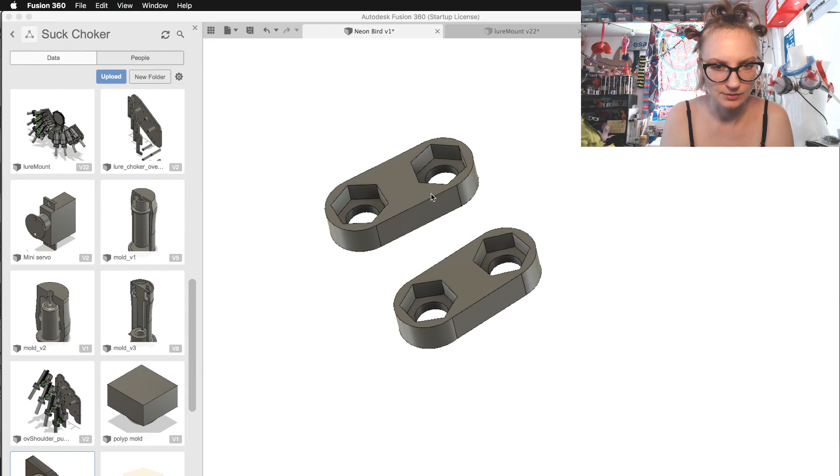Okay. Sure. I knew I was going to use these tiny flamingos one day, so I bought as many as I could last year. And I went to Target just this past Sunday, and I wanted to check and see if they had more, which consequently they did in their dollar section. And I bought out their crappy miniature pink flamingos, and they're on sale for 50 cents, so it was really silly that I not do so.

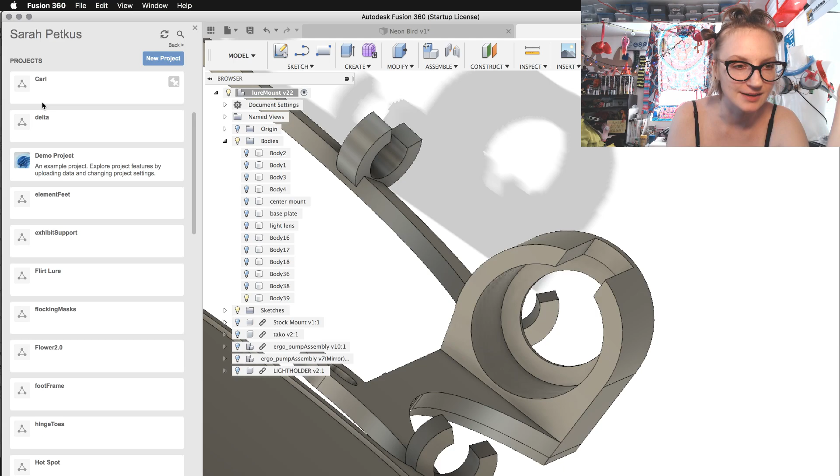Where's Carl? There we go.

Alright, so that's the important part of what I've made so far. Let's see.

Ah, there we go. That's better. Okay, so that's more or less what we've got at the moment.

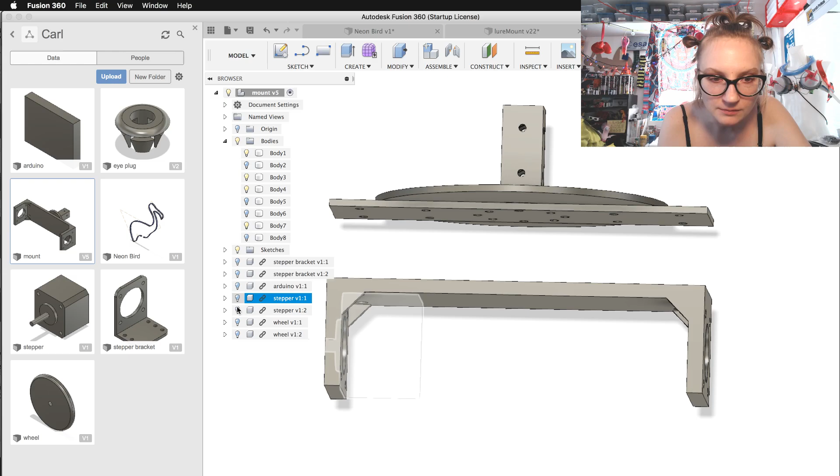So if you imagine spacers on the corners here, and everything just sort of stuffed in this space, that's effectively what I've got going on at the moment. There's my 2 steppers, there's my 2 wheels, and then I've got an Arduino stand-in right here, which isn't doing anything. Yay.

So the thing I need to do is find a way to mount the motor drivers, and they don't have a mounting hole or anything, so I soldered wires to them, hard solid wire into the holes of the pinouts I needed, and the other end is just jammed into a breadboard. So the module is being flailed around at the whim of the solid wire sticking out of the breadboard. I do need to come up with a way to probably get those in.

And the same thing with the accelerometer. If anybody has experience making one of these and you have tips you want to share, I would happily listen to you and your tips. I would accept the advice gratefully.

I'm checking the chat. No, I'm not drawing with a mouse. I'm drawing with this. It's a Wacom Intuos 4. It is over 10 years old now.

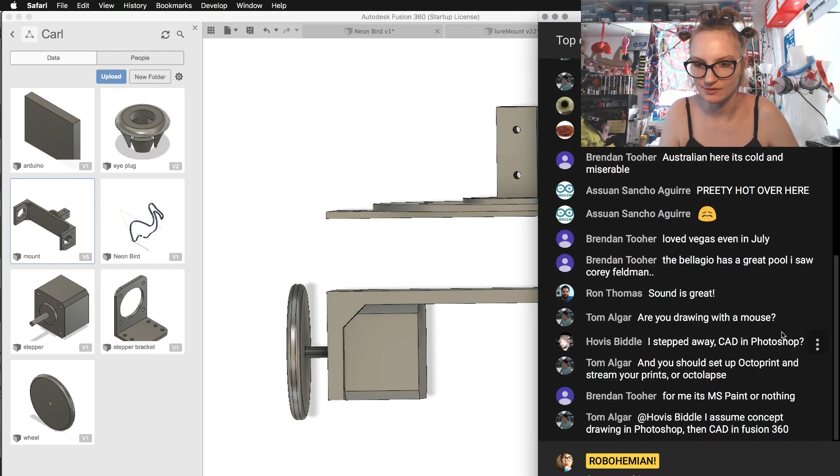Yes, you were right, Tom. Concept sketch in Photoshop, and then CAD in Fusion, as always.

The letter G. I am the letter G. Okay. Where was I?

So I think this piece that I'm about to design, I'm not entirely sure what its critical shape or placement needs to be, because I'm not sure at what point it needs to catch the robot once it starts tipping in that direction. So I'm gonna probably make a shape that can be modified fairly easily, and it's gonna probably be comprised of 2 thin pieces.

So I'm probably going to end up making 2 thin, like 3 or 4 millimeter thick flats. Like such. And then connecting them with spacers.

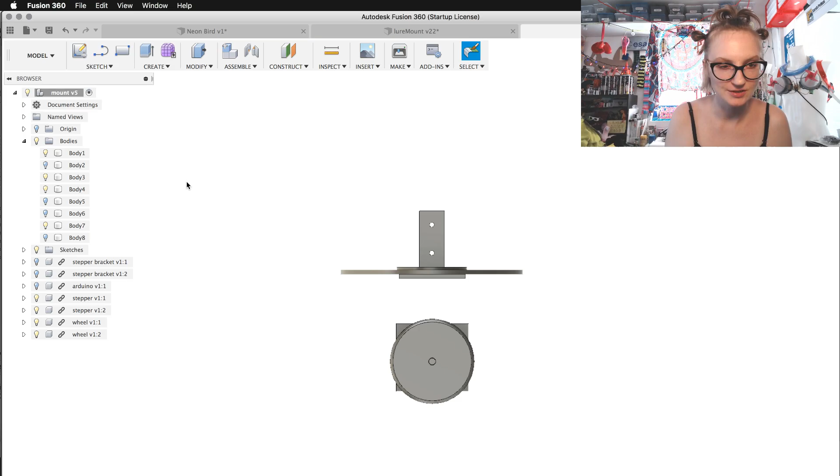No, didn't want to open Eagle. Stop, stop, stop! Hate when you accidentally click an icon and it opens an entire application and you're like, okay, so...

I hate when it corrects too. Why do you do that?

So I'm gonna just guess for now, which is kind of how this whole project has been going. I'm sure there's some magical way. Why am I using this to do CAD? Stop. I'm sure there's some magical way to math out exactly where the bumper needs to be angle-wise in order to catch the bird from falling at an important, crucial point, but I do not know it.

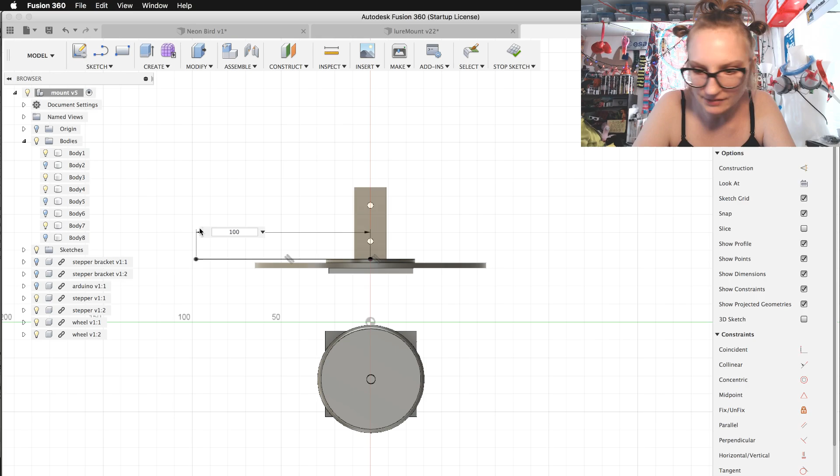The way that all of this development has gone since we started a week ago is I'll do something with no knowledge, then we'll get some code working, then we'll look at how it fails, and then I'll fix it. That's how I work. That's the way I engineer.

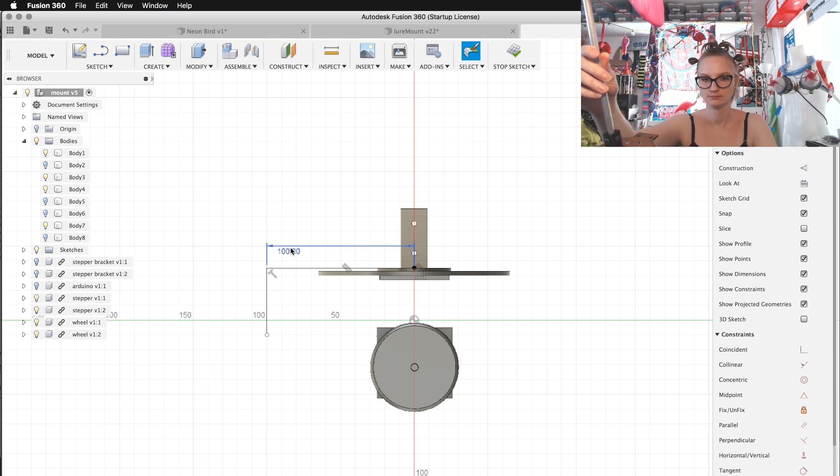And I'm gonna say 45 sounds like a good number. We'll offset this by maybe not 100. That should be good.

Yeah. Okay. Carl, you can hang out right... God, where should I put Carl? Ah, here. You can hang out right here and stare at Noodle.

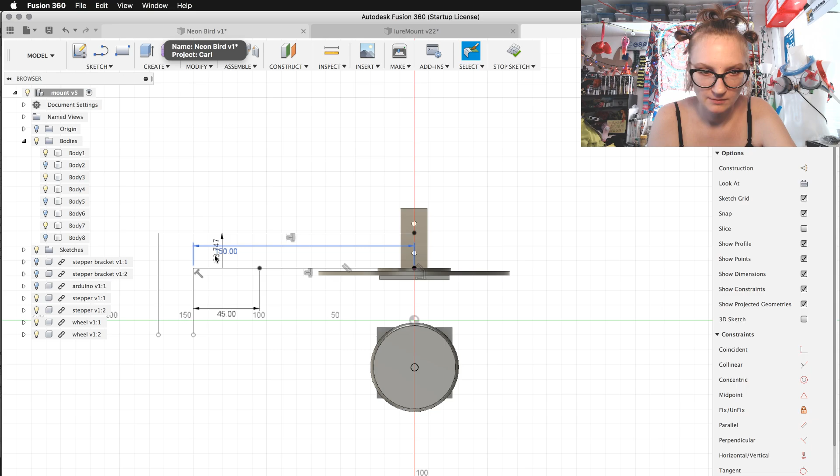Okay, so this was 45, so this will be 45, and then offset this by like 30. That wasn't 30. Oh, you jerk. 30. Thank you. Okay.

Extrude this. But I say, oh, I don't know, 4? Sure. Oh, did that attach? No, I don't want it to attach. Extrude. 4.

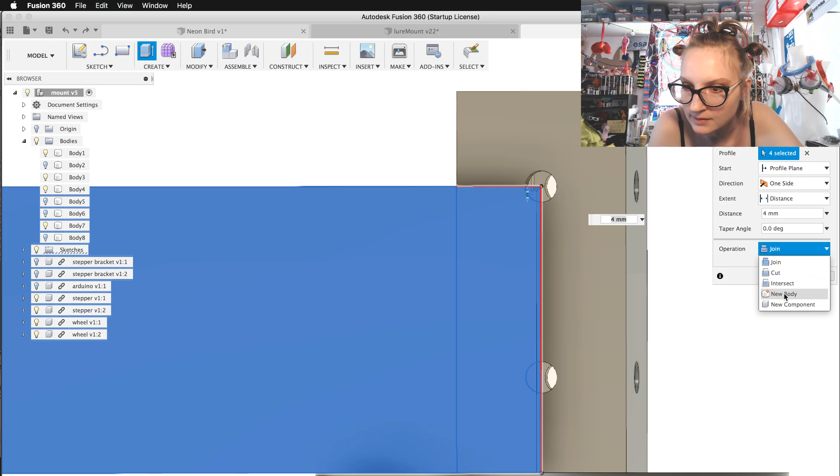Along with these little pieces. I hate when I miss the little pieces. And this is going to be a new body. Okay.

So in order to get that curve like I was talking about, I'm going to call it fillet. I know people keep telling me it's fillet, but I'm going to be irreverent and just call it fillet. I'm gonna fillet these corners and make them nice and roundy. Roundy like. There we go.

It's like a, I don't know what that is. It's like a sad floop. Mr. Sad Floop.

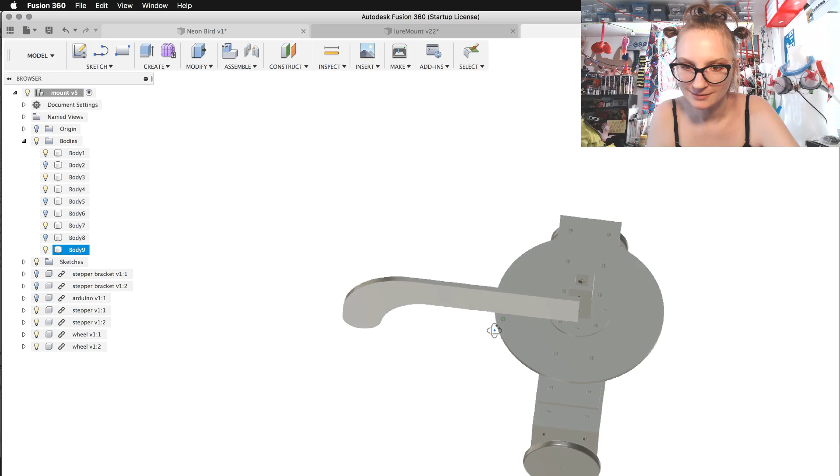Is that going to interfere with these holes? Why, yes it is. That's okay. We'll put that someplace else.

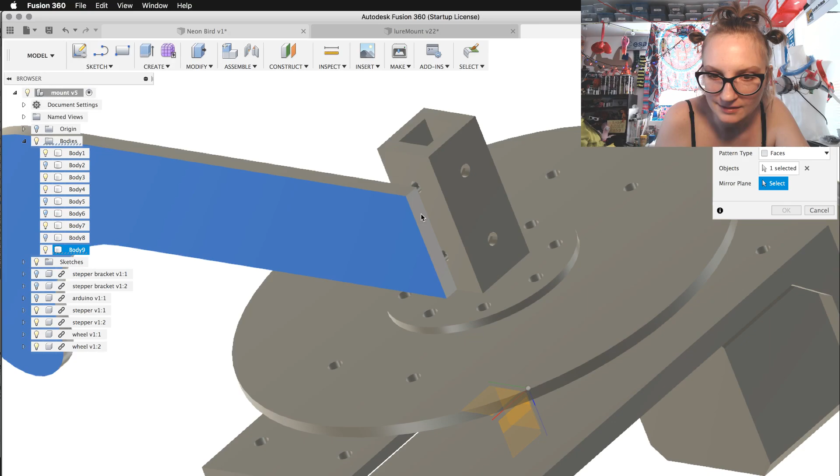Okay, so I'm gonna mirror this so that it's symmetrical and then duplicate it. So if I, oh man, mirror, there it is. I'm going to mirror you on your face, right there. No? It didn't like that? Why? Why wouldn't you like that? Did I do something to upset you? Let's talk about it, shall we? There we go. For some reason it liked that more. Right, modify, combine. Okay.

There. There's Carl's little kickstand. Ooh, that's what I'm gonna call this. Carl's kickstand. You're gonna get a kickstand, Carl. Yeah? He's gonna, like, be able to bobble back and forth and catch himself.

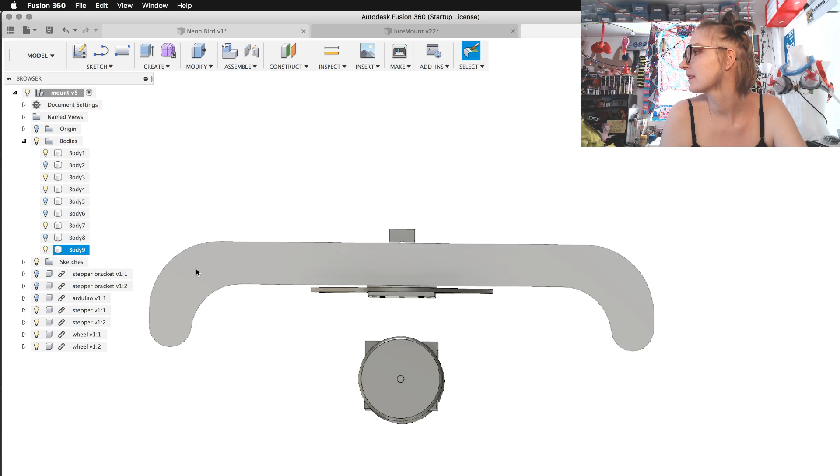I think that the primary reason why I decided to do this, it wasn't actually to save Carl's pretty face. Sorry, Carl. It's for the neon one that I mentioned earlier. I've been experimenting with faux neon a lot lately, and I'm actually gonna do a write-up on how to do the stuff I've been doing to create things that look like vintage neon signs.

I'm from a city that has a lot of neon, or at least it used to, and I was always a very big fan of the way that looked aesthetically, and it's sadly becoming harder and harder to find in my city. A lot of the neon is being replaced with LCD screens and just LED things in general, because they're bigger, brighter, probably easier to maintain. I don't know. It's the future, right?

So the neon stuff is slowly getting phased out of even Las Vegas, which was once known as the neon city. But I like neon, so I personally can't make neon. It was actually offered at my college, but I never got around to taking the class. But we do have cool things these days like light pipe and EL wire, and you can do certain things to them, create fixtures for them that make them look very reminiscent of neon.

And one of the things I wished to do was make a neon flamingo that would balance. The lattice that holds the light pipe I'm using in place is, however, very fragile, so I wanted to prevent it from ever having to collide with the ground. And the bumper is absolutely necessary in the case of this particular neon bird that I'm making.

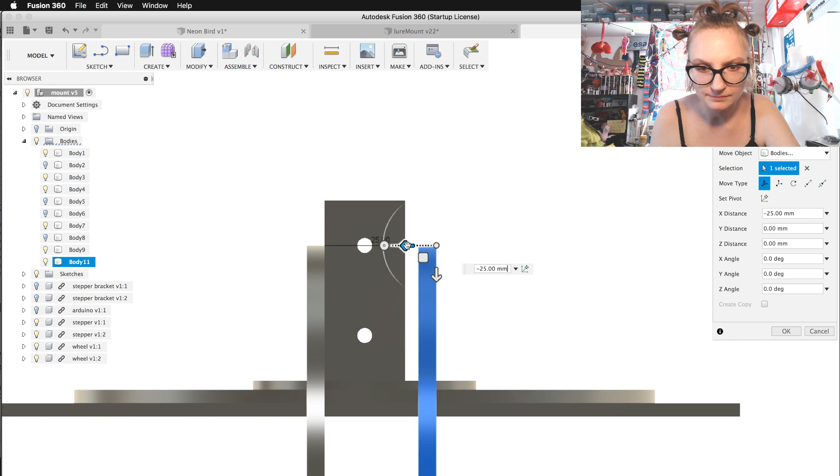And Noodle hates it. He wants to know why he doesn't get a neon body. Noodle wants to be neon. Do, do, do, do, do.

I'm gonna check the chat real quick, because it's been a minute. Oh man, there's a bunch of talking. I'm gonna read it. Do, do, do. I have no direct experience.

Hovis says, what I have read is that you want a cascade of PID controllers. The ultimate output is the angle of the robot. Ah, PID loops. Mark knows we have to use PID loops, and he's not excited about it. The angle is controlled by wheel speed, which is controlled by wheel accel, which is controlled by motor current. Oh god, I'm gonna screenshot this and show it to Mark when he gets home, in case he doesn't already know that, which he might not, because we don't know anything about this.

Okay, thank you. Thank you for sharing that with me. I don't think either of us really know what we're doing.

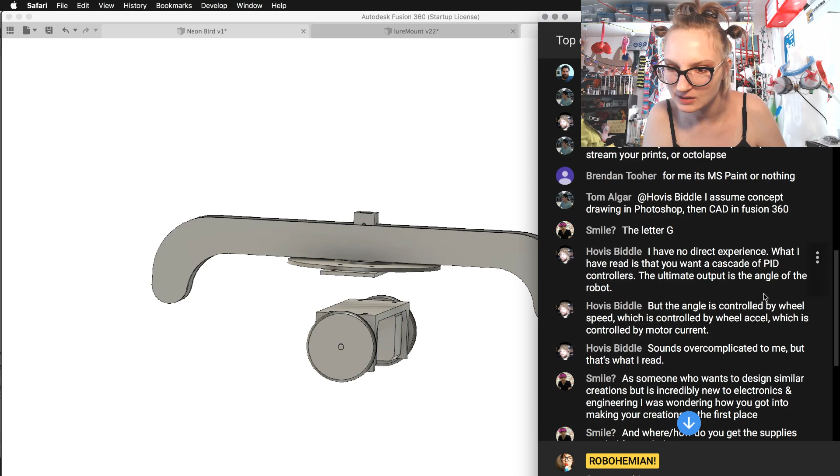As someone who wants to design similar creations but is incredibly new to electronics and engineering, I was wondering how to get into making your creations in the first place.

I guess the easiest answer is that I'm an illustrator, and I went from illustrating this stuff in my head to building it. Back in college, I was prompted to go into the art tech department, which was all electronics and robotics, and their main mantra was just create the stuff that's in your head. Ever since I was given permission to do that, that's what I've been doing. The things I would normally draw or write about, I now take a stab at making in the real world, which is a lot harder and more gratifying, because it's hard. Every single thing I make, I have no idea how to do it when I start, just like this, but figuring it out makes it even more rewarding in the end.

How do I get the supplies needed for such things? There are a couple places. Raw materials you can get from McMaster-Carr, which I don't even know how to spell, but if you try typing it, the internet will know what you're looking for. They do raw materials and shapes you can make stuff out of. I go to Mouser for electronic components, get my boards made with OSH Park or Seeed Studio, and use EagleCAD for board design and Fusion 360 for assembly creation. That's the main stuff I use, and everything starts as a drawing.

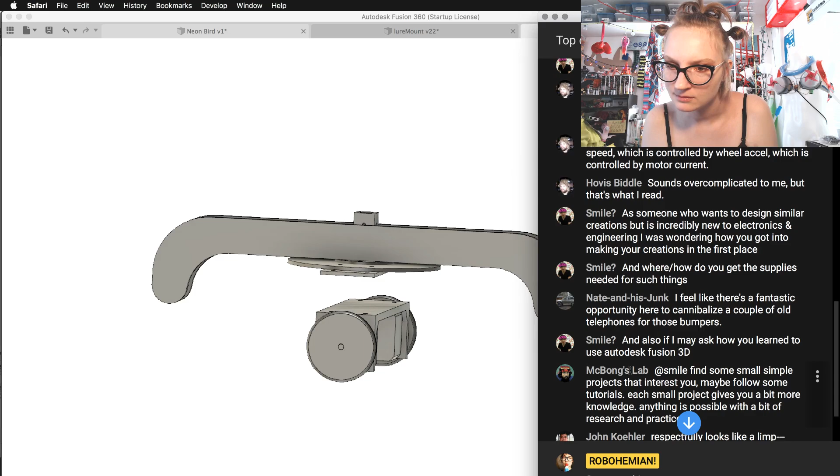How did I learn Fusion? There are a lot of good resources and tutorials online to teach you things you're unsure of, but to get started, I took something I had designed in SketchUp - the most difficult shape I ever created there - and had somebody who knew Fusion walk me through recreating that shape using the parametric CAD style. Once I saw how it was done, related to something I was already familiar with, it clicked in my head and I was able to figure it out on my own from there. It did take a person familiar with it to get my toes wet, but after that, a lot is available on the internet.

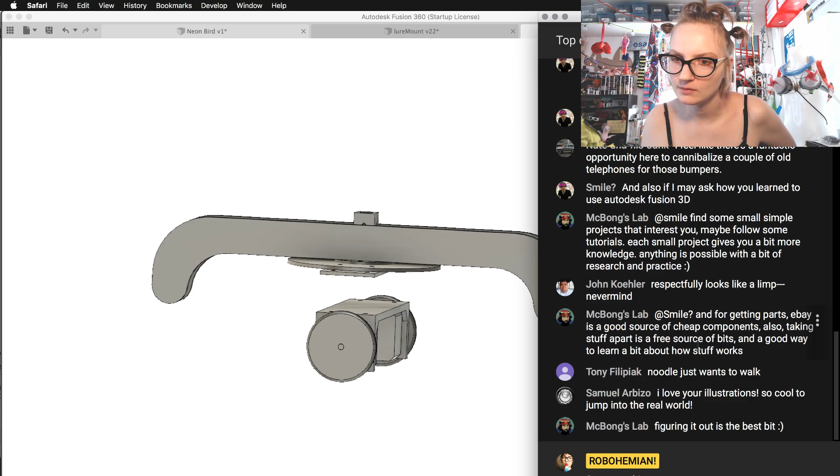John says it looks like a limp dick. I was thinking the same thing but wasn't going to say it - but here I am saying it. It looks like a sad phallus.

Oh, Tony, I know Noodle just wants to walk. Hi Tony, by the way, good morning - is it still morning? No, okay, good afternoon.

Noodle, I have to show you this now so I don't look like a terrible parent. Oh god, where'd it go? Oh no, did I lose Noodle's leg? Maybe I am a terrible parent. No, okay, Noodle's got it. Noodle's getting new legs - this is one of them.

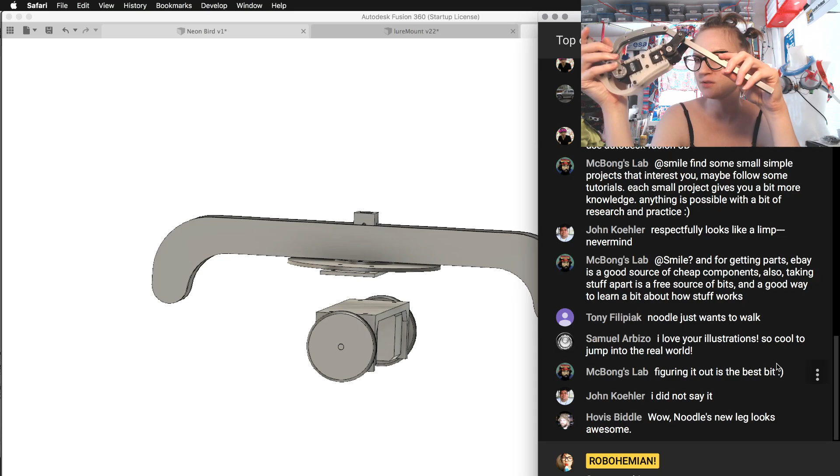This needs to be bench tested with the motors mounted inside it, same as Carl's new chassis needs to be tested once I'm done building it. So the two of them are going to get their mobility in tandem with one another. While I'm waiting on Mark to test out code for Carl's new body, I can work on finalizing the dimensions of this leg for Noodle. Eventually these will all get recreated in aluminum, but probably not until they're all made in plastic first. I'll have to buy a bunch of these servo motors, which are incredibly expensive, so I'll probably buy them 2 or 3 at a time while I have money, or maybe do a small GoFundMe for motors, because I don't have a lot of money, and Noodle's going to get expensive from here on out.

Noodle will walk, damn it. Tony knows that.

Figuring out is the best way. I'm glad you guys like the new leg. It looks cool. Here.

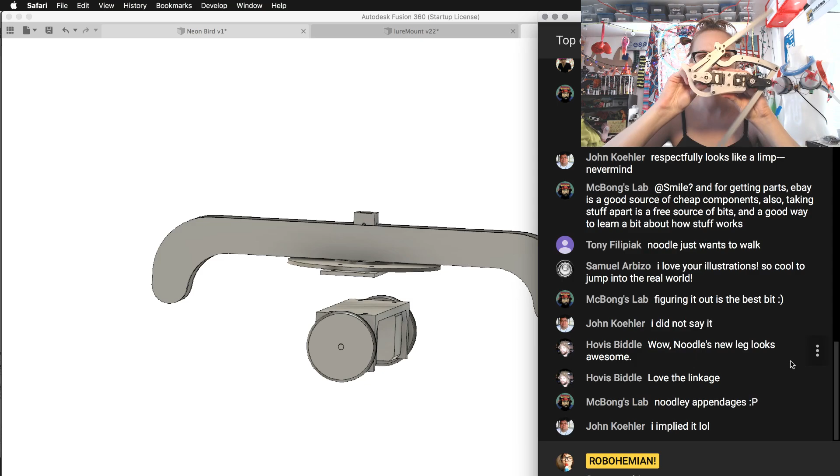I can just actuate it with my hands, so it bends. The tendon motor is down here now, and then there's a motor in the knee so the leg can actually swing out a little bit like this, which is the main difference between the old leg design and the new one.

Because this tendon motor that makes the leg lift is actually located up here with the tendon going down to the crossbar, and I moved that down so his weight is lower. One of the big problems he's always had is that he's incredibly top heavy and wants to fall and be a big heavy pendulum and just topple over.

This will alleviate that, as well as give him a bit more scooting ability, because this motor will allow him to scoop his foot. I don't think the dimensions of this are final - I think I might be able to make this better. So it'll get massaged before I finalize the dimensions of all the linkages and make aluminum pieces out of all of these. But soon.

Anyhow, back to the telephone thing. I don't know, would a telephone be long enough? Like if I just used an old telephone receiver thing as the bumper, do you think the length would be long enough to actually catch his fall? Or would I have to cut it in half and extend it out, which still might look pretty cool? It'd be like a really long phone.

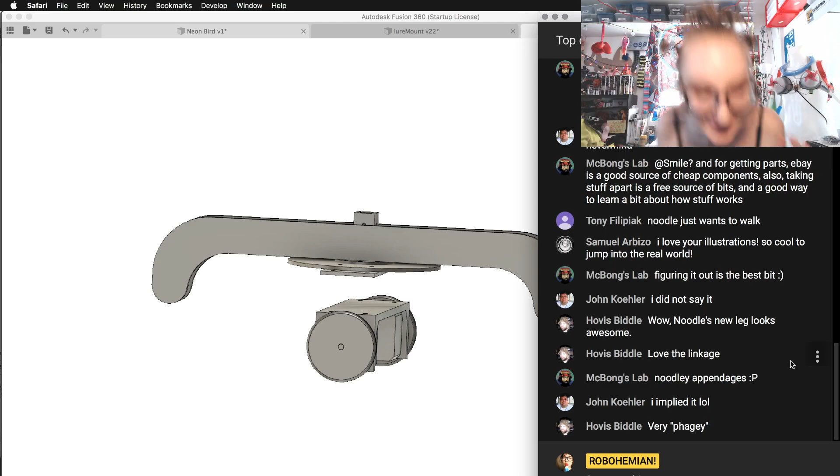Anyhow, I'm gonna print it first because that's the lowest hanging fruit. Get a 3D model of the classic phone and stretch it out in CAD. Yeah, I might do it.

Are you guys still looking at the right thing? Yes, okay.

So here's my limp phallus telephone bumper. That's its official name now. Carl's kickstand.

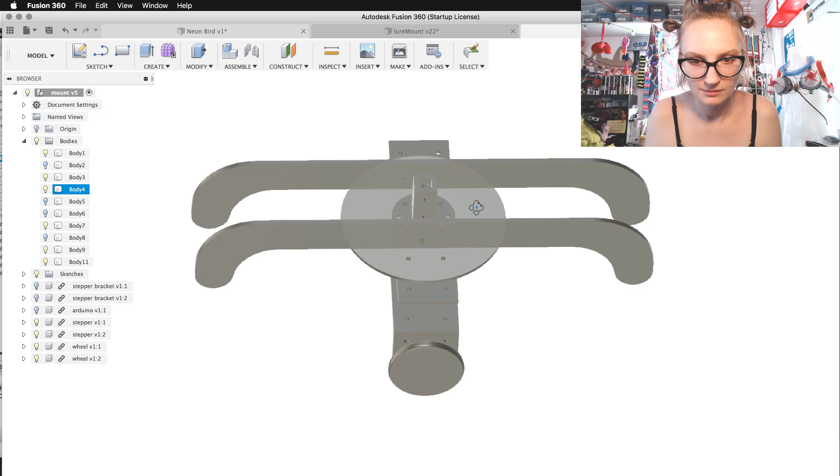So I'm gonna move you probably out 10, 20, and I'll move you out 20, okay. All right, and then the distance between these two guys, these two telephone phalluses, is 58 millimeters, which I don't like that, or maybe I do.

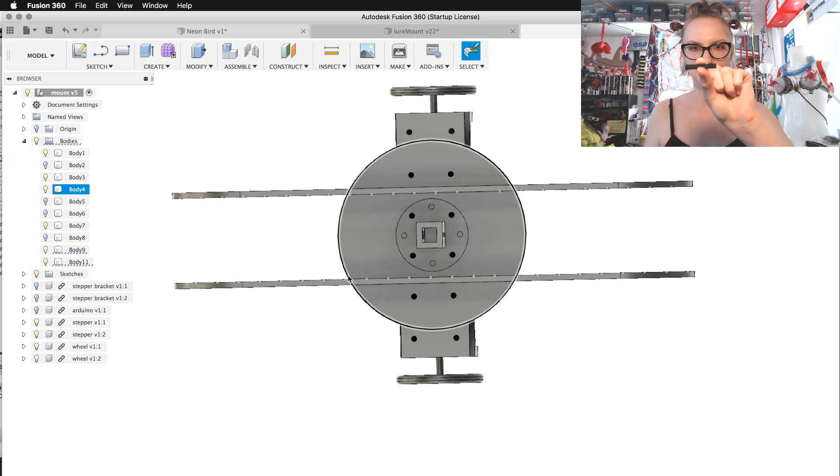So the reason why I'm held up on this, I have spacers that are threaded that we used in our Delta Robot kit, Mark and I, and I believe these are 40 millimeters thick, and they're nice because I can screw into them from both sides. I try to use these wherever I can, because the longest hardware I've got currently is 50 millimeters, so that means it wouldn't span through both of these with enough space on the other side for me to get a nut on there.

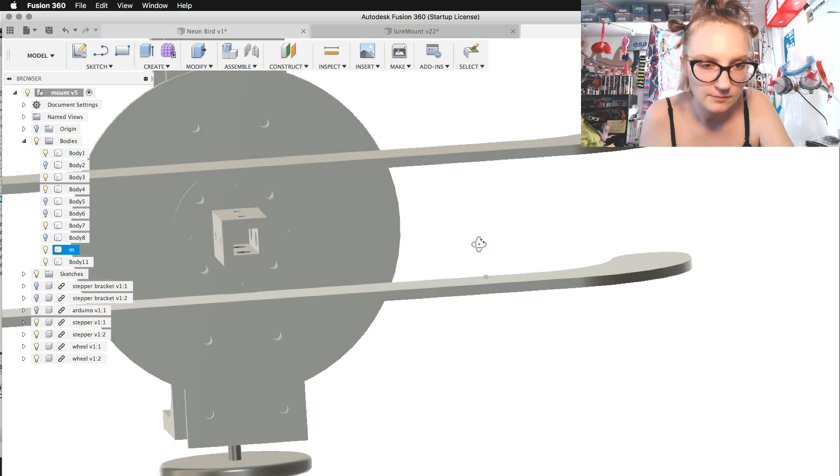So I'll probably move you in. No, I don't want that much. This will be 48. Okay. And 40 it is.

And then the best mounting point is going to be so that it just doesn't clear those two holes on either side right here. So it's probably not going to be flush with those.

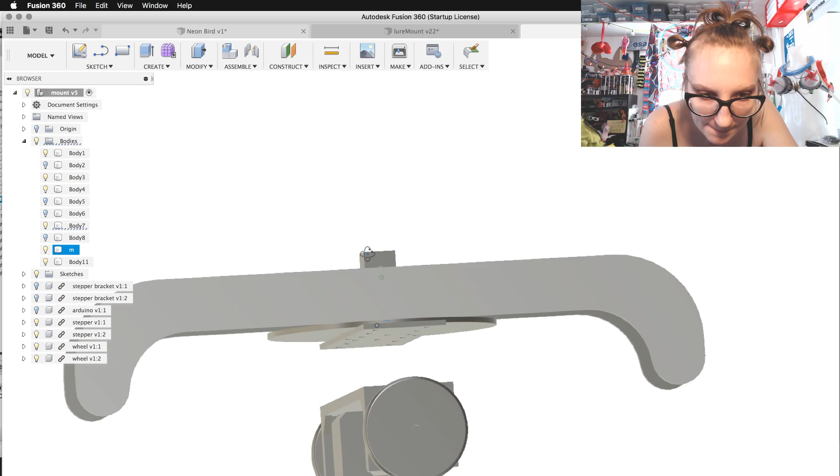It occurs to me that I can mount stuff probably along the entire bottom plane of this weird telephone dick shape that I made. That's tempting - probably shouldn't do that, but like basically this whole underneath portion, so long as I keep it clear from the ground and the wheels, is potential mounting space for all of the electronics.

I'm gonna look at the chat real quick. Okay, yeah.

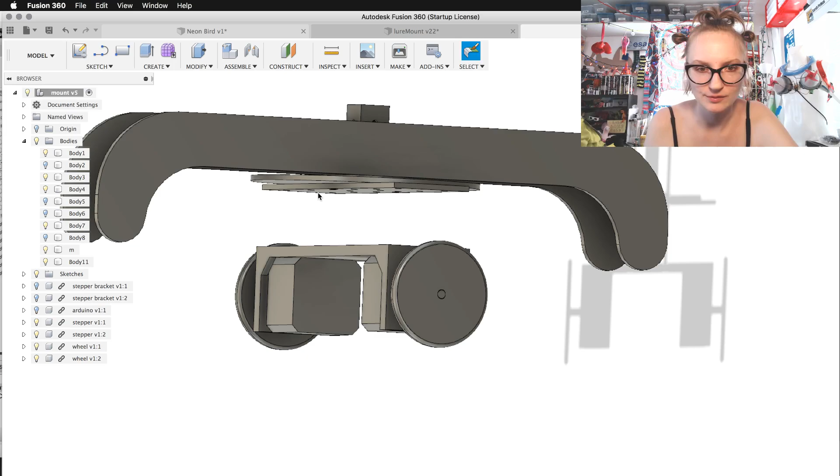Massive skeletal bird feet - that is an excellent idea, Mr. Bong's lab. Yeah, bird feet, big skeletal bird feet, one in front and one in the back, like big raptor feet. I think the original circuit board I designed for the ball balancing Carl looked like a bird foot - it had like 3 toes, one for each of the motor controllers. But it never got used.

Okay, so that's 40. So that'll effectively catch it roughly at that point. So that's roughly the angle he'll be at where it will catch his fall if I leave that located there.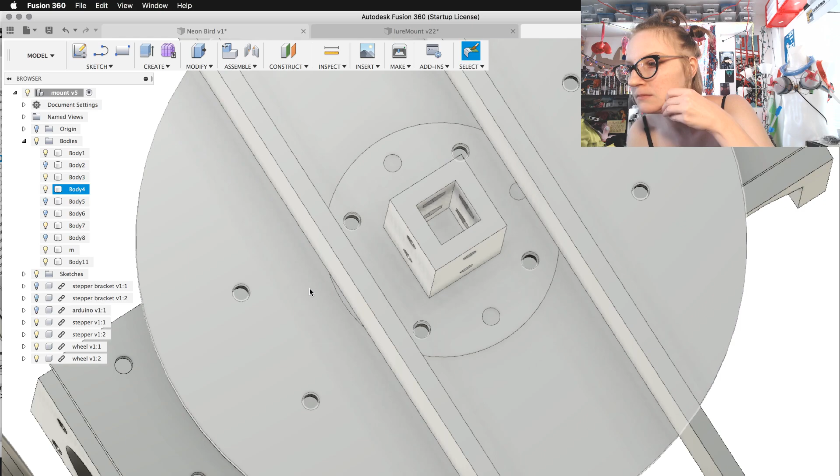Okay, so the thing doesn't clear those holes. It can sit on top of them though. I don't have anything mounted in them right now to begin with, so that's fine. Okay, I can use those as tabs. Okay.

Create. I'm going to explain what I'm thinking in my mind right now. This circle right here and this circle right here, I'm going to make tabs that are going to connect to this plane right here, and they're going to be the mounting points for this wall. I'm going to do the same thing on this side, so there'll be 2 tabs here. So that'll keep it grounded and centered and attached to the core part of Carl.

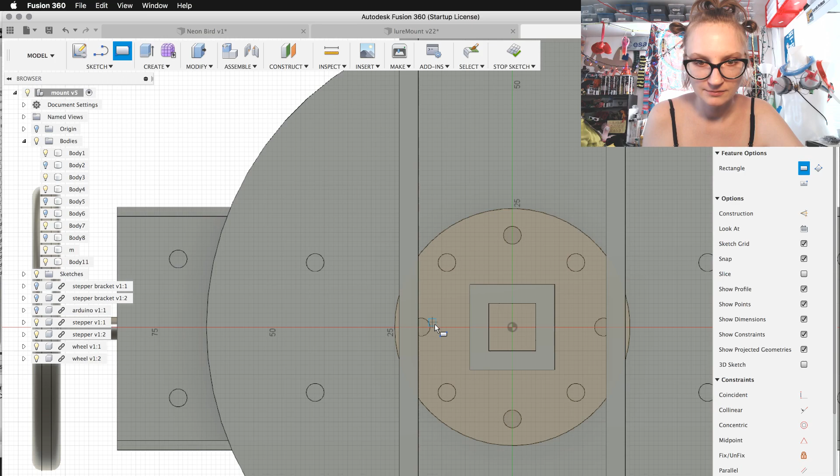I don't know if that'll be enough. It definitely won't to start, but it is what it is. It'll do for now.

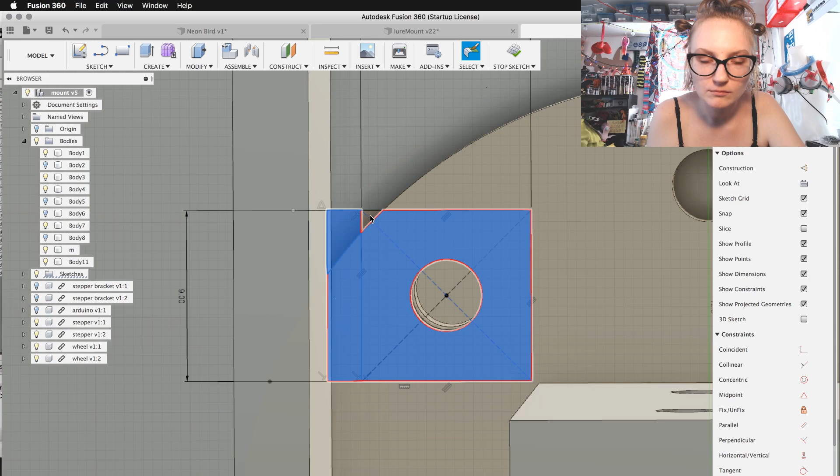That'll be a new body. Yeah.

Alright, and then this will get copy and pasted down here.

Ow, it's laggy because I'm streaming. I hate it, I hate it.

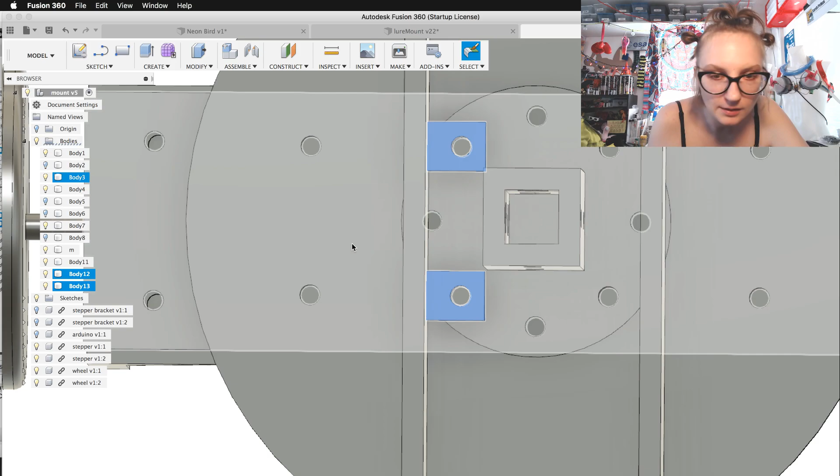Go. And then you two can be mirrored on this plane. Okay.

That's not... I can do this thing that I just learned how to do.

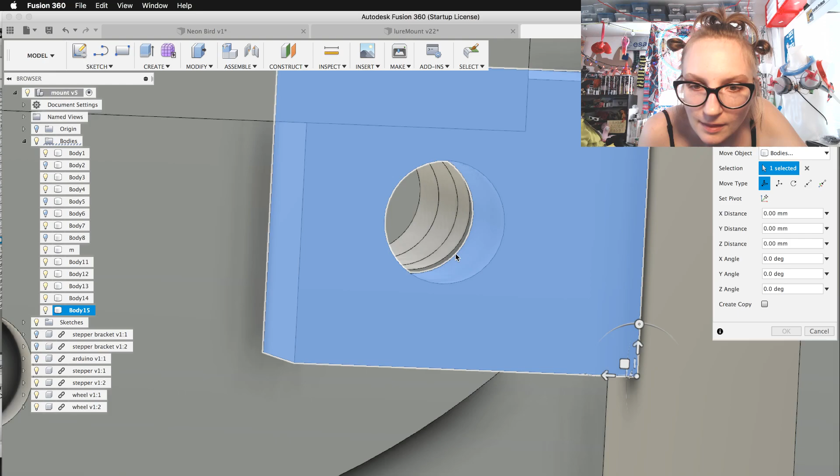Move, point to point. Move this circle to this circle. Thank you. Same thing with this guy. Move. Move. This guy to this guy. Why don't you like that?

I don't understand what the holdup is. There we go, okay. Sheesh.

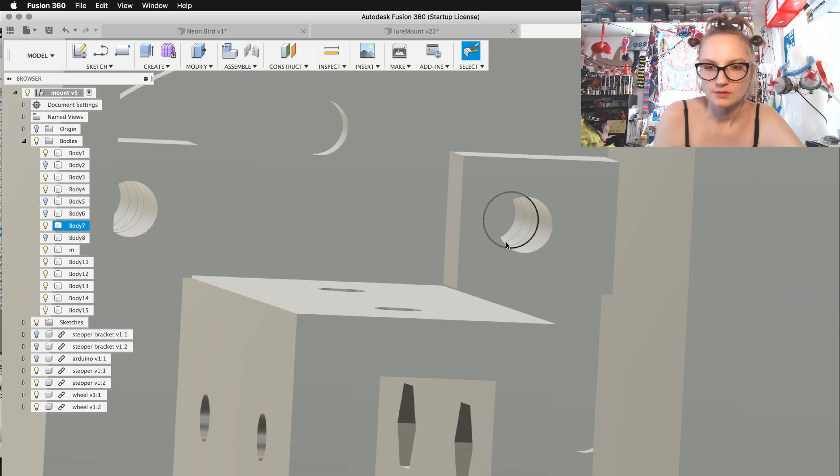Modify, combine. Okay, those are connected. I'm going to fillet these corners.

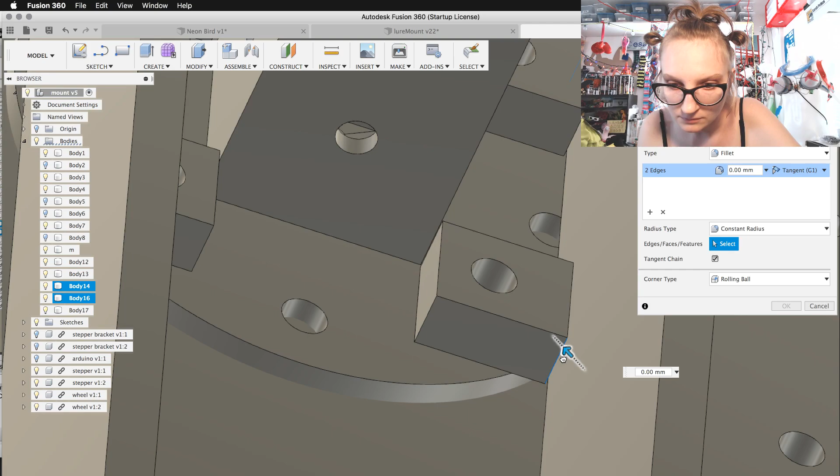Oh, that's not connected. How did that happen? Ah, those are not centered. That is why?

Interesting. Yes, they are not, but just barely. Okay, let's see, how can I fix that? I do not know how to fix that.

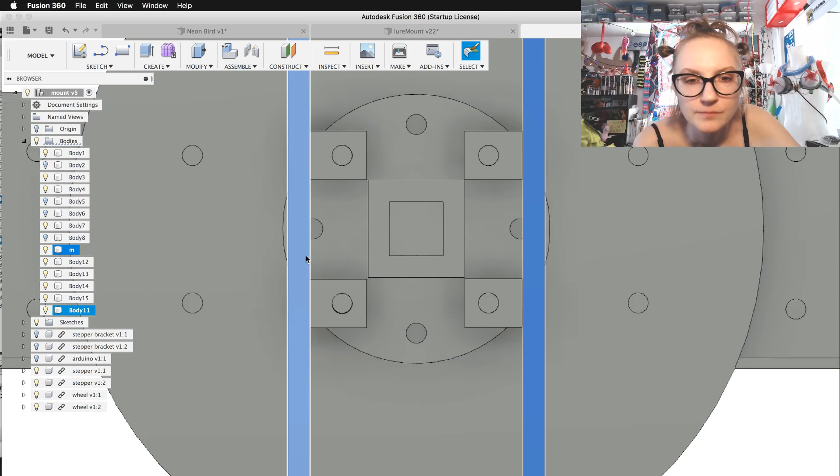Okay, so that's you two. How do I center them? It's a good question.

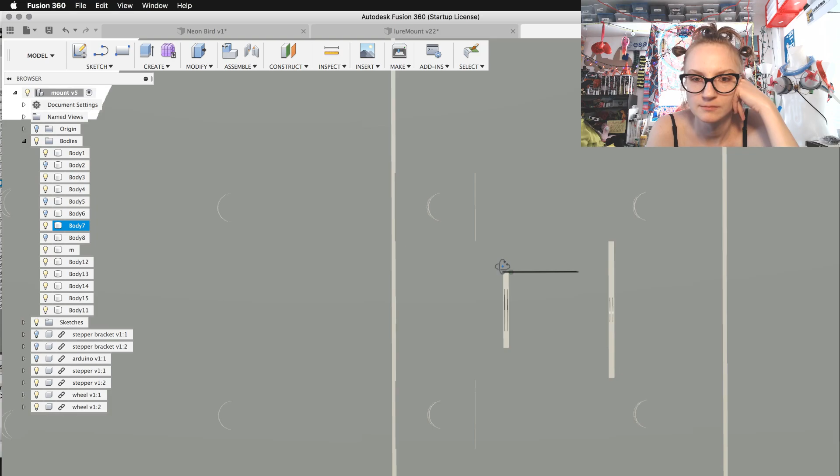As I stare into infinity... so these are not even. Okay. Think.

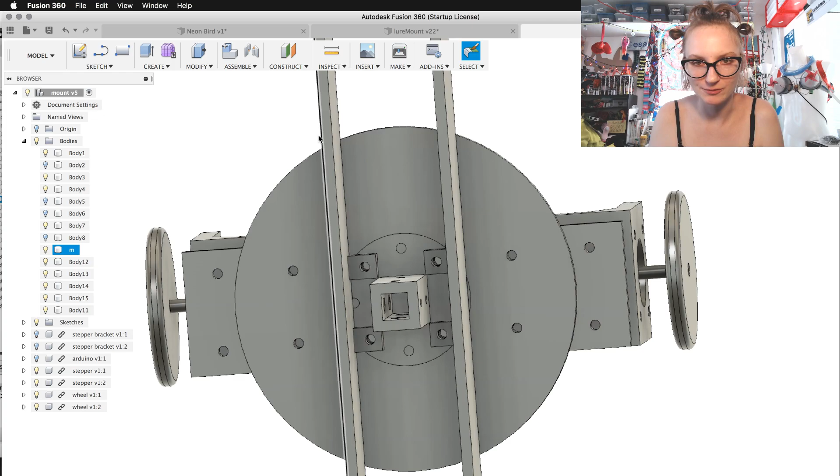Okay, so the space between these needs to be 40 millimeters, and I want these two objects to be centered over the rest of the assembly. I don't know how to center things over the whole relative assembly, like have things snap to the middle of the relative x, y, z of itself. It seems like there should probably be a way to do that, but I don't know what it is. Kind of like in Illustrator where you can have things align to the artboard. I don't know what that equivalent is in Fusion 360. If you know, please tell me, I would appreciate it, because that's the thing that's confusing me right now.

So I want to basically group these two separate shapes and then align them to the center of the assembly, because it seems like they're off by like a very remedial amount.

I'm gonna check the chat because I just asked a question. Oh hi Maker Block, how are you doing today? I don't know what time it is in your neck of the woods. About ground filth getting into the electronics down there - I don't know, all my robots are ground filth.

And they don't get dirty, so I don't know. I'm not sure, they'll probably, like the design will get refined a lot pretty quickly once we have a solid idea what it needs to be. I'll redesign it and have it look nice and sharp and clean and not be all garbagey and low to the ground, but for now this is kind of the easiest thing to do, so I'm gonna go with it.

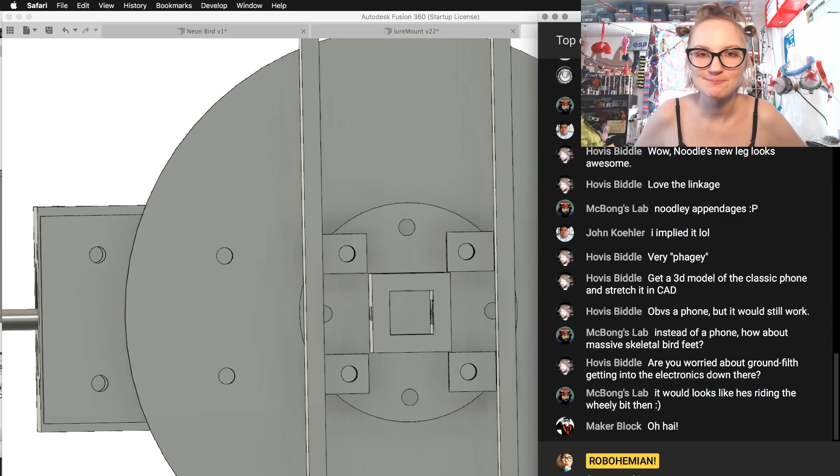So if it gets all dirty, it's just a phase. It's kind of like toddlers, right? They just get all over the ground and get ground filth all over them. You just have to give them baths. Or don't touch them, that's what I do. Maker Blocks in California, okay so you're the same, you have the same weather as us. In fact we get your weather - if it's raining in California today, chances are it's going to be raining here probably tomorrow. That's how that works for Vegas.

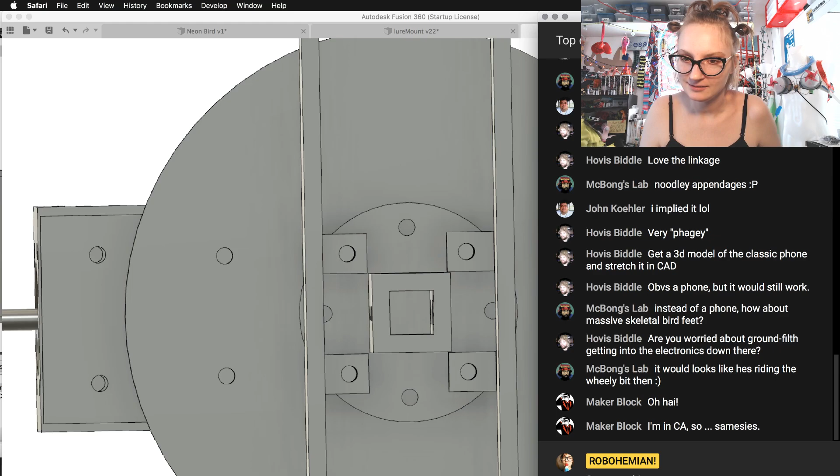Damn it, this is a new leotard, so there's like a tag on the inside and it's itching. I forgot to take it off. But, alright.

Boompers. The limp phallus boomper.

Okay, so right now I think the easiest way to alleviate this is to measure this face against this face, which is 11, and then if I measure this face against this face, it says it's also 11. What the fuck? Okay, so they are centered, and these should be identical, but these two overlap.

And on the other side they don't. Or maybe they don't overlap, maybe they just looked like they overlapped. Yeah, they do, they totally do. But then on this side, they don't.

And these pieces are mirrored. Are the holes off on the thing? This other thing? They shouldn't be. My confusion is deep.

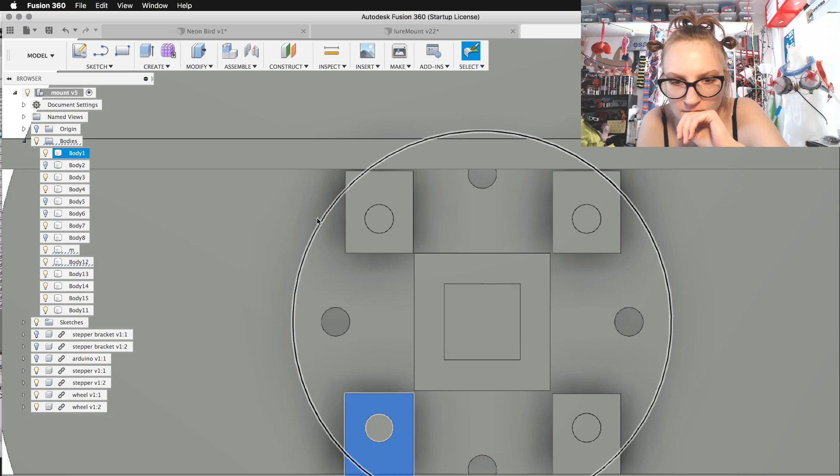They're definitely off, because the space, like here, they touch, and then they don't touch here, not even close. Why is this? What have I done? I don't know what part of this is not consistent. So these holes were radially placed around the center axes, so I'm not entirely sure what the hell's going on here.

Okay, how about this? If I combine these, and then I shut these ones off. So if I create a mirror of this person...

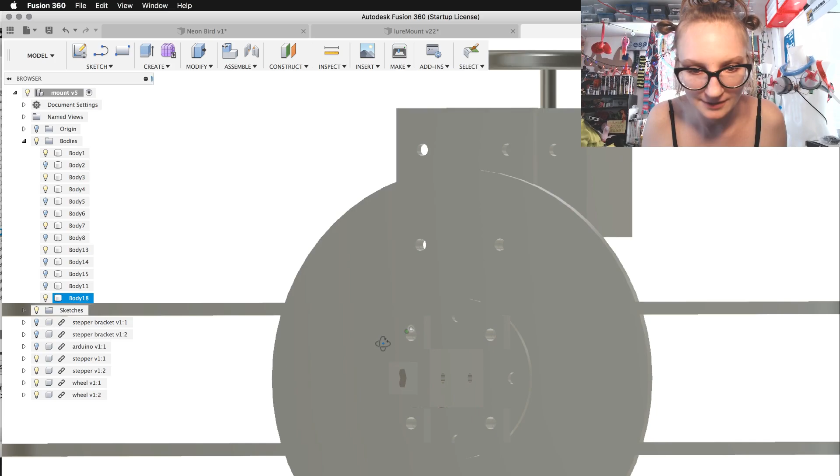39.6. You know what, fuck it. That's close enough, that's less than half a millimeter. I know at least one person in the stream is probably cringing at that, but it's not enough for me to get up in arms about, so I'm not.

In fact, here, I can do this. Extrude negative 0.2 on one, negative 0.2 on this face, negative 0.2. Did it do it?

Now if I measure the space between these two, it's 40. Perfect. Okay, I don't know, something is not right, but I haven't really been paying much attention while making this because it's the first iteration of a thing, so I kinda don't care. I probably didn't care when I messed up whatever threw everything off. And I'm gonna keep going.

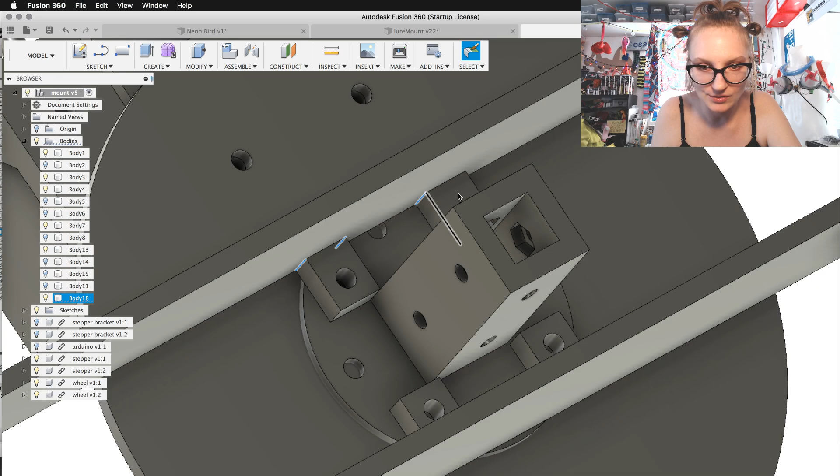So without further ado, I'm going to fillet the corners of these little tab bits, and then I'm going to print them, which you guys aren't going to get to see, and that's disappointing, but it is what it is. I'm going to print 2 of these and add them to the current assembly, and the next thing I'm going to do, probably before the end of the stream, is redesign how everything mounts inside of that cavity, and that might not even involve any CAD.

Whoa, that did something weird. What the fuck? What the hell? I don't know why it did that. 10? 10 is good. Sure, okay.

She doesn't know what she's doing. I don't. It is true.

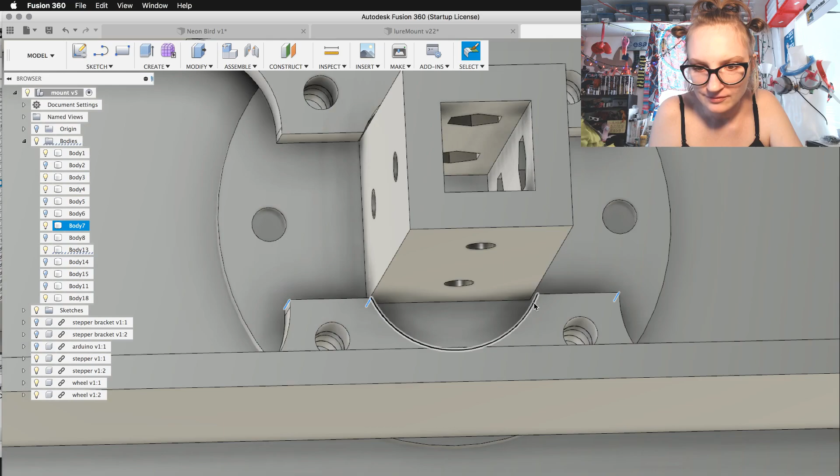I don't know if I'm gonna actually make any mounted CAD plate stuff for the guts. I might just end up getting some silicone tape, that double-sided sticky tape, if we've got any, and tacking it down to something currently on the inside of that enclosure. It's probably not the right way to do that, but it's the easiest way, and as I mentioned like a million times, it doesn't have to be perfect right now, not yet at least.

There. The thing that is kind of crucial is I need to stop the vibration from reaching the accelerometer, so that probably does need its own dedicated platform to be mounted on that has some sort of shock absorption, like foam, or a tab of silicone that it can just sort of sit on like jelly and soak that up. I don't know what I'm gonna use, but I think if I change anything, that's the part that needs to be alleviated, fixed, remedied.

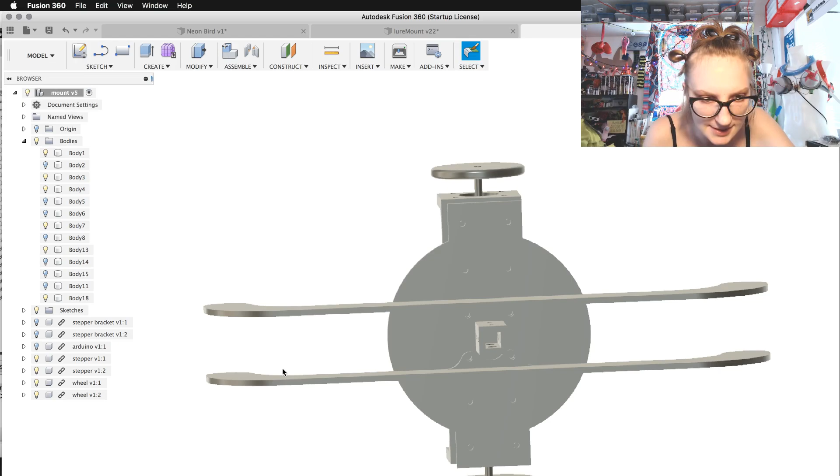Alright, I'm gonna print one of these. It needs holes, that's right. I need holes for these spacers. Where should I put them? I don't know, I'm gonna check the chat real quick.

Hi people. Aw, we missed you too. We missed Maker Faire, we always see the pictures everybody posts and we're like, aw, we just want to go to the parties and hang out with everybody and catch up with friends.

Hi David. You want the accelerometer to be very rigidly attached to the robot, otherwise you'll get laggy data and sloppy response in the balancer. Okay, rigidly attached to the robot. But it seems like the vibration of the motor is causing issues, a decent amount of issues, because it's responding to the vibration rather than anything else.

I think Mark mentioned something yesterday about adding a filter that kind of gets rid of a lot of that, kind of like you do with audio when you're getting rid of hiss or noise in the background. So I think he might look into doing something like that today or tomorrow or next weekend.

You can get pads for mounting flight controllers on drones. Thank you for the suggestion, I didn't know those existed.

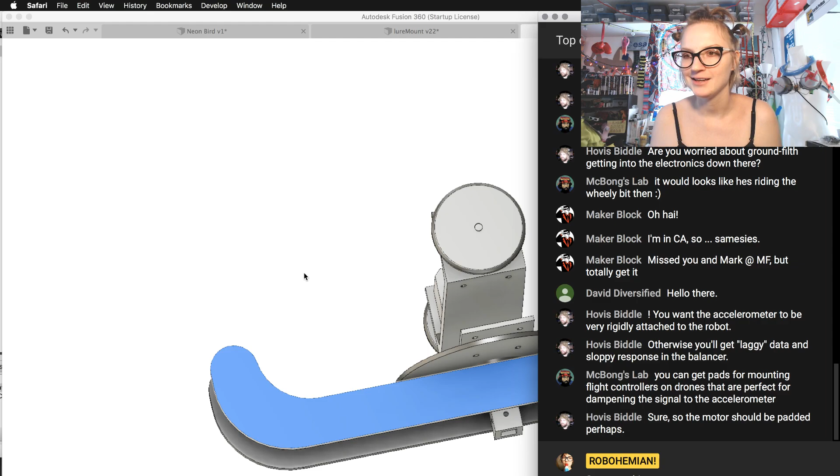The motor should be padded. Okay, can do that. So maybe between the motor where it mounts and the thing, I should put like, what makes a good dampening pad, I guess, is the question I should be asking. The thing I can think of off the top of my head is foam. Is foam on the right track, or some sort of rubber? I'm not even sure.

And then Hovis—does it matter where you put the accelerometer? Does it matter if it's close to the point where the tilting is happening, or can it be up higher? Like where is the ideal place to even put the accelerometer? Because Mark suggested the same thing too, having it up above. I don't know if there's some advantage or disadvantage to having it away from the base, from the radial point where the tilting is happening. I don't know. I'm sure I could dig around and find some documentation that states this, but

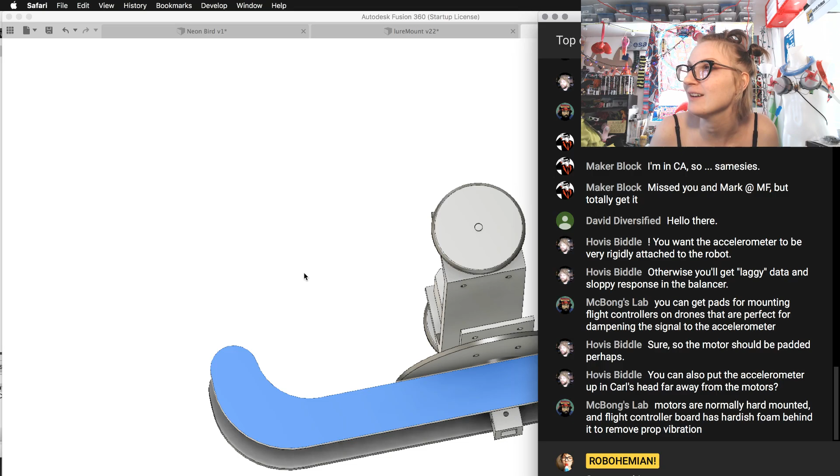We're just sort of feeling it out blindly right now. Because I could move it up—I could put it inside of Carl's body or at his head even. That could be his actual brain. Ooh, he'd have like an inner ear. Carl's inner ear. I like that.

But anyhow, holes. La la la la, holes. Offset this. Do do do do. Okay.

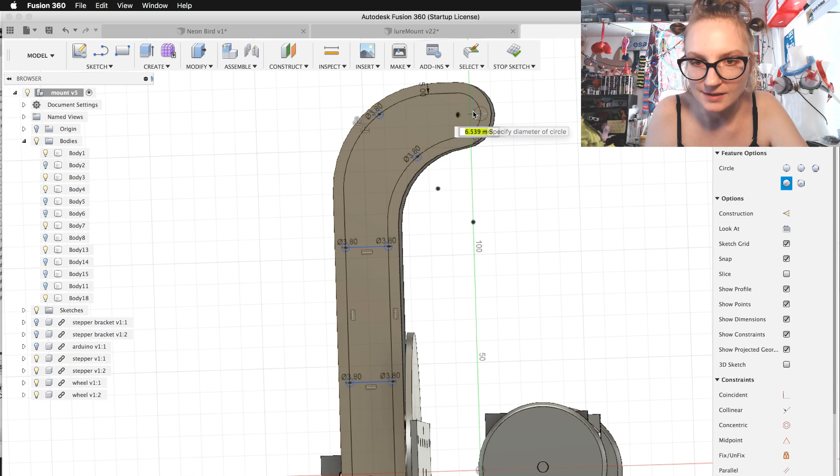My limp phallus. That is what that looks like, though. Maybe I'll intentionally make the final iteration of Carl's kickstand so that it looks like an actual telephone, but without using an actual telephone.

Guess I can set this to construction line. Same thing with this. And this. Okay.

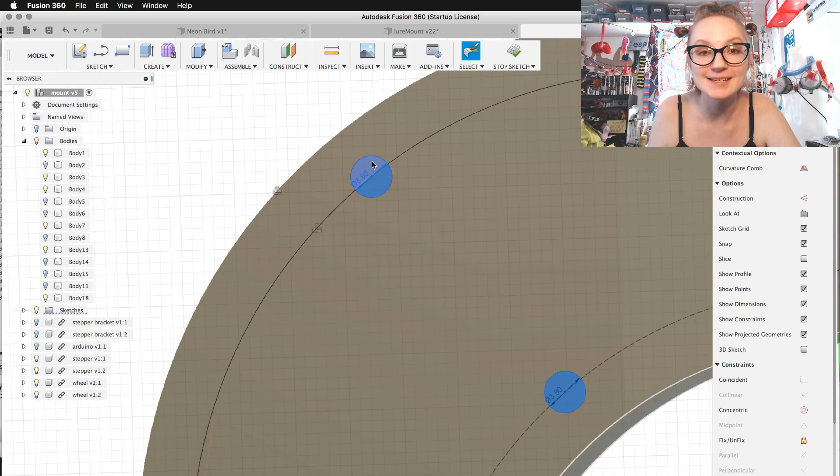I think tonight is LAN party night. My friend Matt, my gamer friend, who I'm pretty sure I've talked about a bunch of times on my streams, at least once every spring he comes over with his computer tower, and he has like a million video games on Steam or whatever, and he curates them based on my taste in games because he knows me pretty well, and he'll show me stuff. We've been trying to coordinate a night to do that for the past couple of weeks, because I need a new game to play. I kind of have this spring off, so I want to maximize that. Oh, see, I shouldn't have mirrored that yet. Knew it.

That's my way around getting to, or having to, mirror those holes, and just the holes, or redo that whole song and dance I did with the rectangle and the offset, because I'm lazy. There. Modify, combine. I'm sure I have a lot of habits that make people grit their teeth, as far as CAD is concerned. Combine. But I think that's all of us, right? We all have habits that probably make other people grit their teeth.

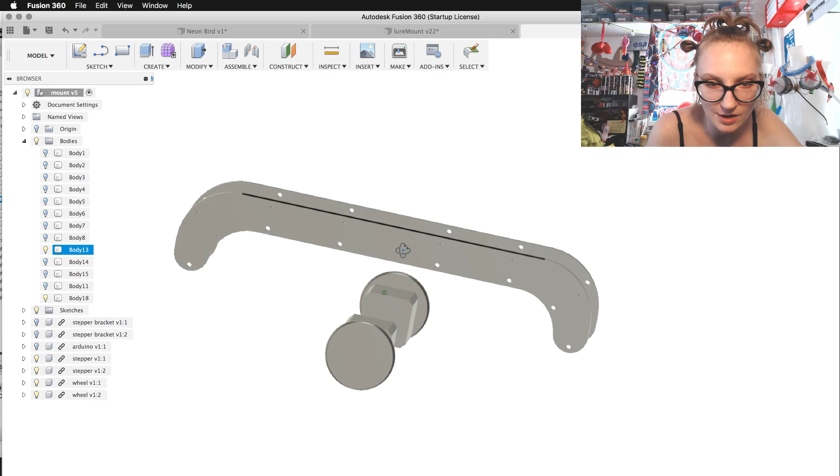Okay, so I've got my holes for my spacers. I've got the mounting tabs for the center of this doodad. And there's the Carl base mount right there, which this is actually going to be attached to. What is that? I don't know what any of these shapes are—I should probably name them. I don't know why there's a circle there. It just seemed like the correct thing to do.

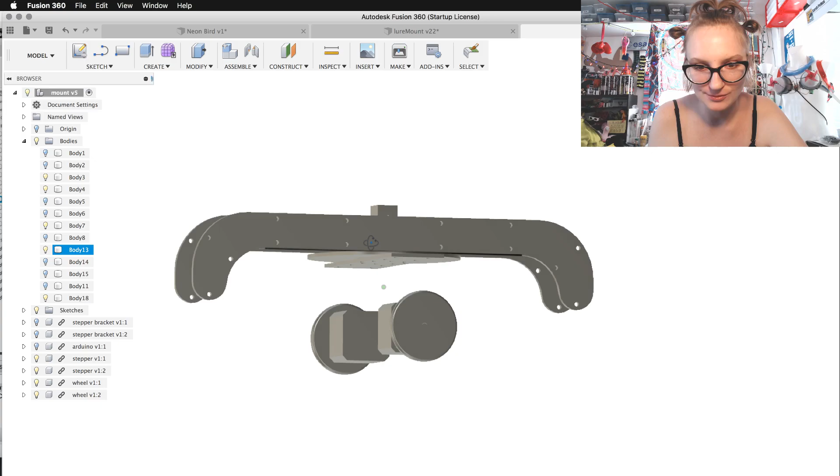So he has like a masonite circle below his mounting throat, I guess, whatever this mounting piece is for his pipe leg. And the circle mounts onto the top plank, which is a standoff amount away from the wheels and the bracket that holds the stepper motors in place. So that's how that do. And then this should technically be 40 millimeters away from that, which it's 32—it's not. So I'm gonna move that up 8 more millimeters so that it's accurate to the thing that's on my desk.

We'll go up 8 millimeters. Okay, there we go.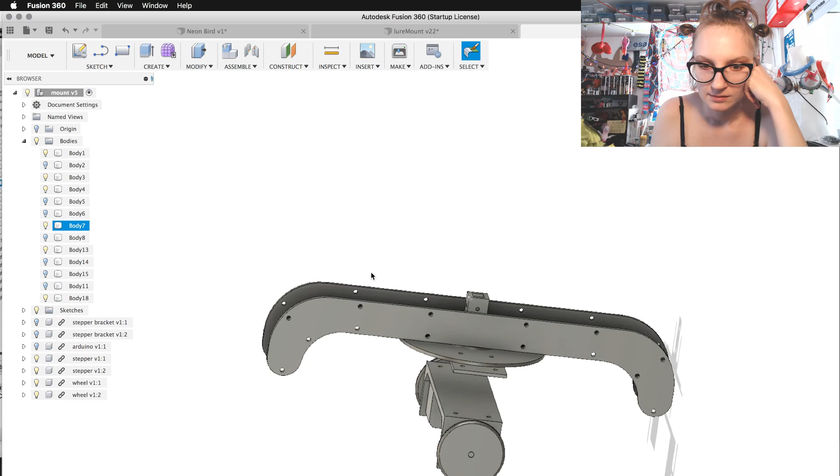Guess the other thing I could do is I could insert the neon chicken into this so that you can actually see a visual representation of the character that will be embodying the body that I am designing right now. No. Move.

And he's going to need his own stand too, it occurs to me, that will mount to the bottom of this body piece. Body piece.

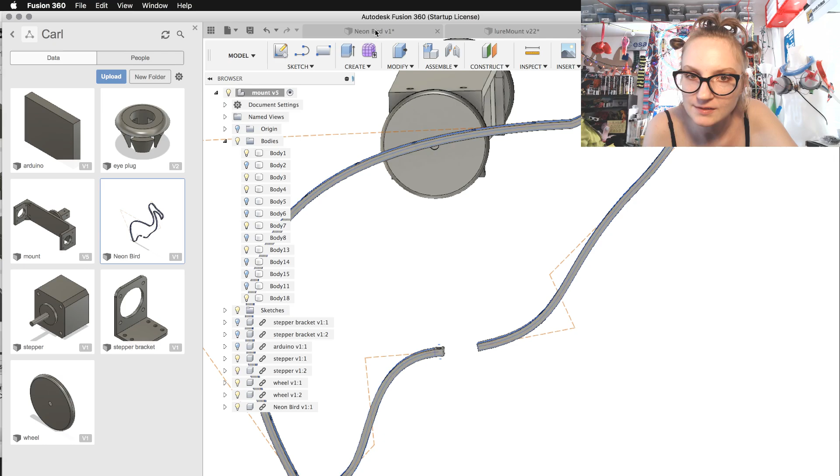Okay, and I actually need to close this so it will save. There. Turn both of those on. Close Neon Bird, save Neon Bird, and then update Neon Bird in the actual assembly file, which is this. Parts need to be updated. Yes, yes they do. Update parts.

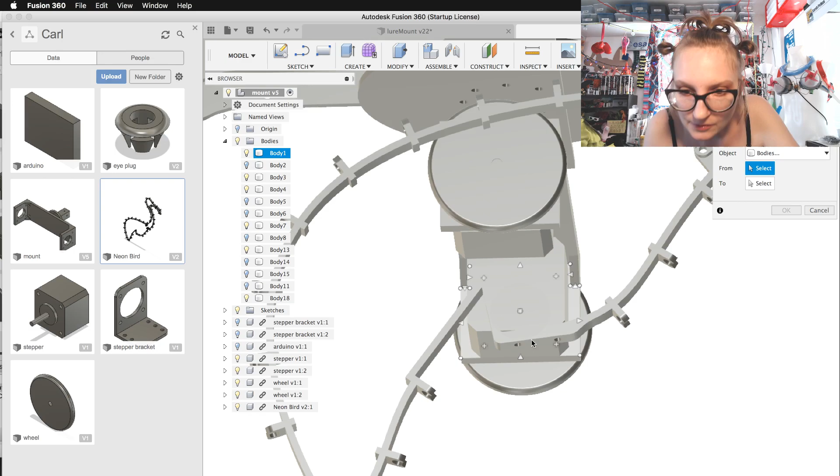There we go, it looks a lot more spiky. I like it. Okay, so then this, or this—I learned that you can do this thing called modify align. This was a fun thing, this was important. So you can align a face to another face, which is really nice. So I want to align... it will not let me? No, you have to let me. Like this face to this face.

Bodies. Why doesn't it want me to do that? Okay, it didn't like that.

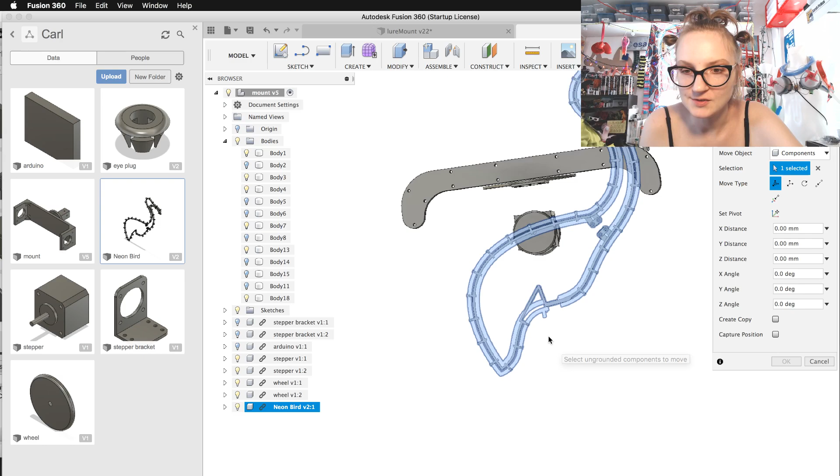I was gonna say that was a very helpful tool that I enjoyed using, but it's apparently not as helpful as I thought it was. Oh, it did align something, just not how I wanted it to. Okay, so I'm going to undo that.

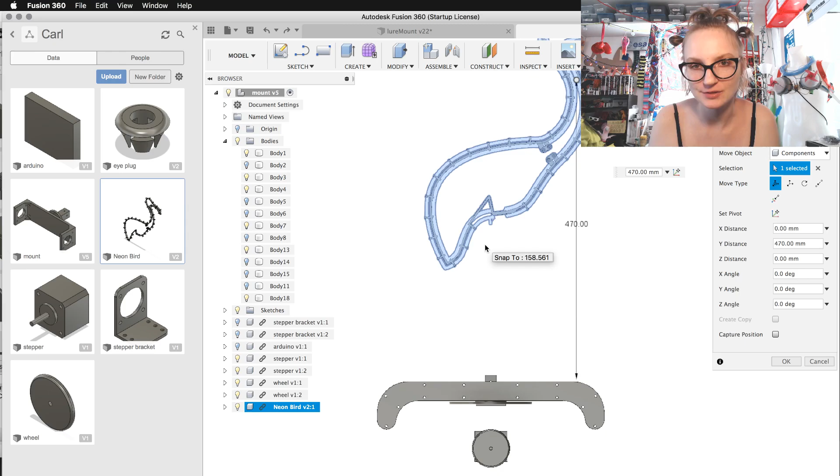Cry at night. Okay. Does anyone else have CAD dreams? That's another thing - if I do CAD enough on a project, like if I spend all day working on an assembly like this, I will actually go to bed and dream that I'm trying to move pieces or do an action and it's not working, and I'm getting frustrated, and my brain's overclocking itself trying to think of some clever workaround to force the software to do what I want it to.

Which is probably not what you're supposed to do. You're not supposed to force the software. Here.

From this, I want it to do that. From this, to this.

Yeah? Did it do it? It did it! Ah, yes. I love when it does it. Okay, so it aligned those two things to one another, and I'm happy.

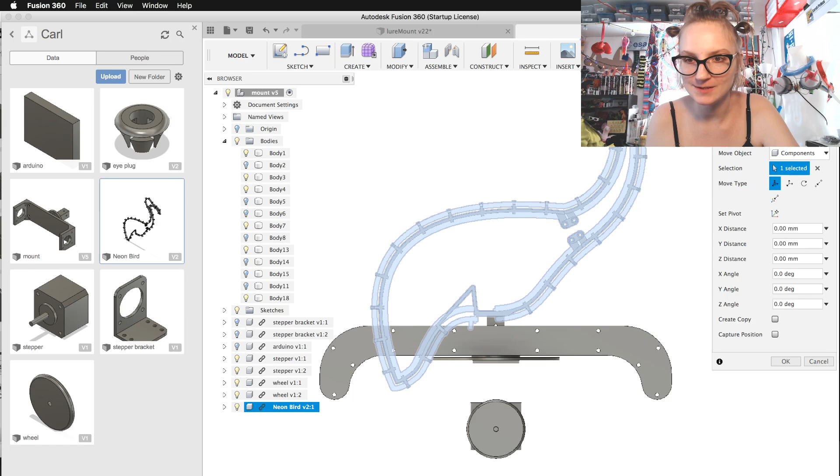Okay, so Neon Bird - I have to reset that, don't I? It's okay. That should be good, good enough. And then, yeah, that's what I thought. I don't know why that's the bottom, such as it is.

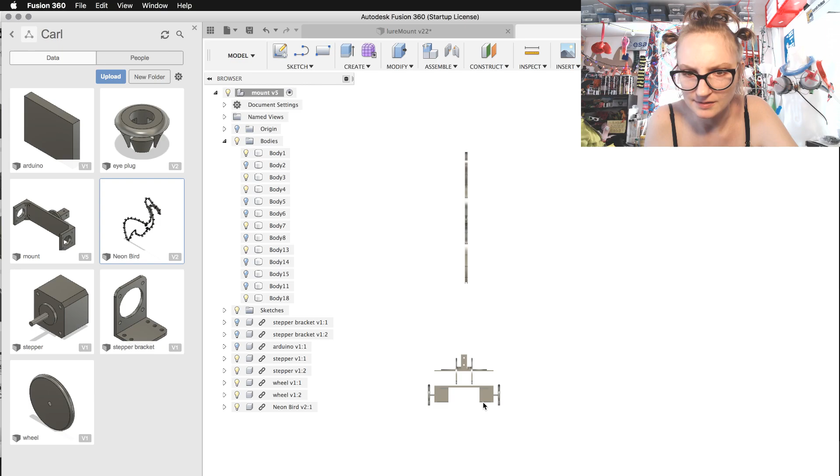So I'm gonna go ahead and print both sides of this, and I'm going to attach them to Carl, this fancy, handsome gentleman right here. And I'm going to try and reattach this to that menagerie that I showed you earlier, like his actual chassis that has all of the goop in it right now.

This. And I think I'm gonna leave the guts sort of hanging out of it for now, short of the accelerometer, which does need a new home. So I'll probably make a little stand for it someplace that makes sense and stick it on here with some double-sided tape.

So it's probably not going to be a thing I do in CAD - it's probably going to just be a piece of wood or something with some squishy shock-absorbent material, and then it'll be mounted to that. And that might just go like on the side right here. Oh god, Carl, you go here - like right here or something. And then I'm gonna pass this back to Mark.

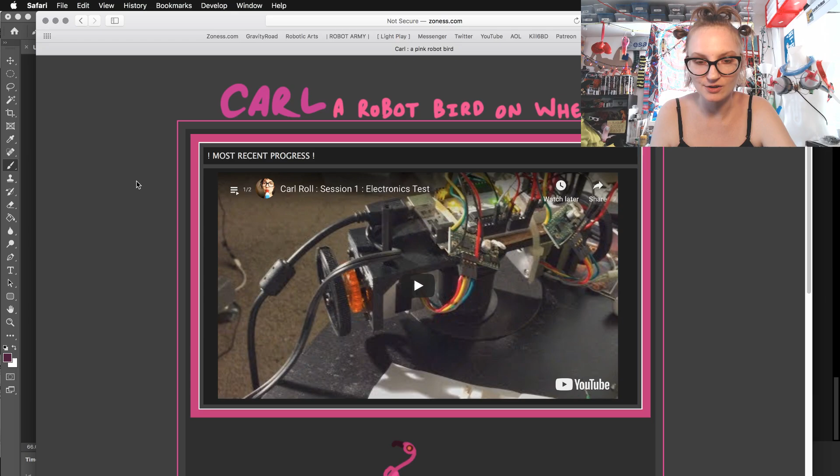We've done a little bit of play since then. I need to get a video of where we're at right now with this current iteration as it is, to show how it doesn't work, and then I'll move on.

And then Noodle, similarly, if I be real fancy, I did a thing that introduces both of the robots, Carl's story. You can read that if you want, I'm not gonna inflict it upon you, but there's a link here at the bottom to the page with all of Carl's updates, and then one for Noodle that takes you to Noodle's walking endeavor page. He does have a GitHub because me and Noodle's daddies took a stab at getting him to walk in January of this year, and we made some decent progress.

We did come to the conclusion that he can't walk well in his current form without getting that extra knee swinging upgrade. So before we take another stab at the walking code, I'm gonna have to do some hardware stuff. I'll have to make him new bones and new legs, so mommy's gonna have to do what mommy does... sort of okay, I shouldn't say best. Mommy's gonna make Noodle his new body, which means he's going to also need a bigger brain, so he's gonna get a new brain circuit board, because the one that he has doesn't have enough pins to support all of the motors that will be needed to make him walk better.

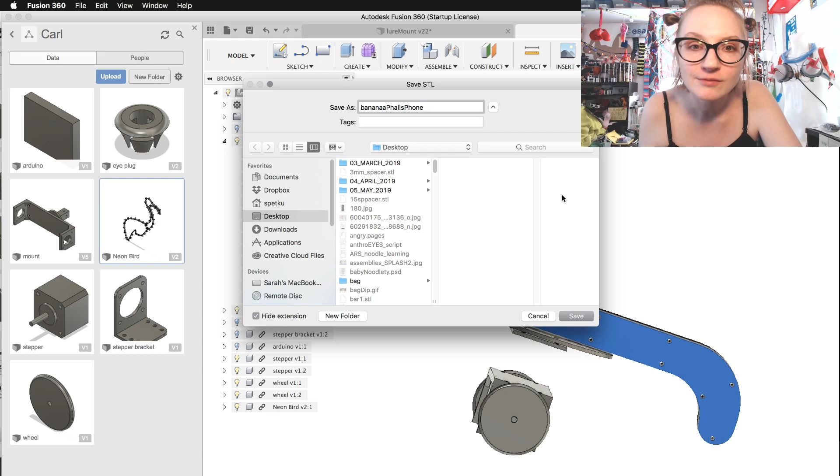Okay, so I'm going to export my banana telephone phallus. Let's even call it that. Banana phallus phone. That's not how you spell probably any of that. I don't care. Here, I won't subject you to my dirty desktop.

Oh hi, AP Tech, how are you doing? I'm doing swell, I'm doing okay, I'm hanging in there. I recovered from my sunburn. I don't know if anyone saw on Twitter I was complaining about not being able to do video because I had a tan line, which I don't know if you can still see, but I was very, very red in the body, and I looked like I had been attacked by the sun beast.

Okay, let me throw this on a platform. Ooh, that might not fit. Always bigger than I thought. Wait, what? Okay, that is a very long piece.